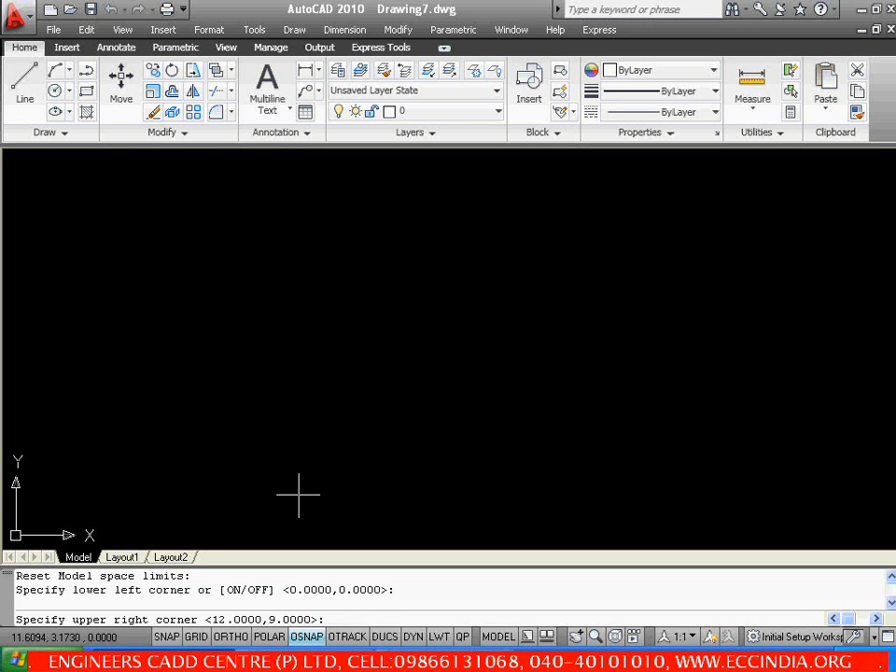In this session, let us see how to draw this figure. First, let me go to AutoCAD and set the limits. So go to AutoCAD, the limits, lower left is 0,0 and the upper right is 10,10. Then go with zoom all.

Now look at the figure. First I am going to draw the left side circles, that means these two circles. If you see here, the dimensions are clearly specified. The inner circle dia is 1 and the outer circle dia is 2.

Then after creating these two circles, I am going to draw the right side circles. In fact here they are arcs, but directly if I go with circle, it will be easy for me to pick as well as to specify the dimensions. So let me draw this figure by going with AutoCAD.

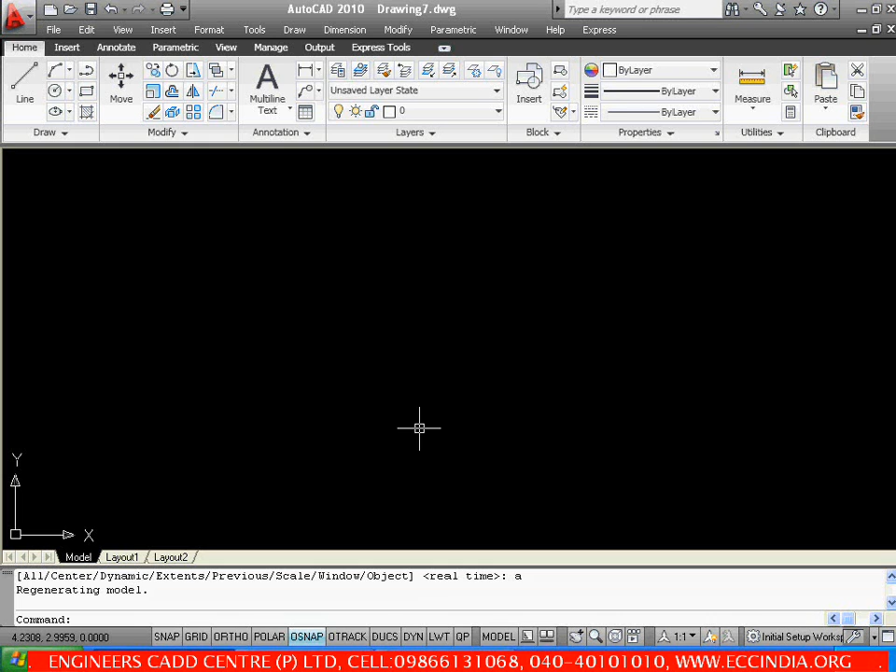First let me go with construction line. One is vertical, place it, and the other one is horizontal. So again go with XL, horizontal, and place it. Now I am going to use the intersection point of these two construction lines which I created as the center for the left side two circles.

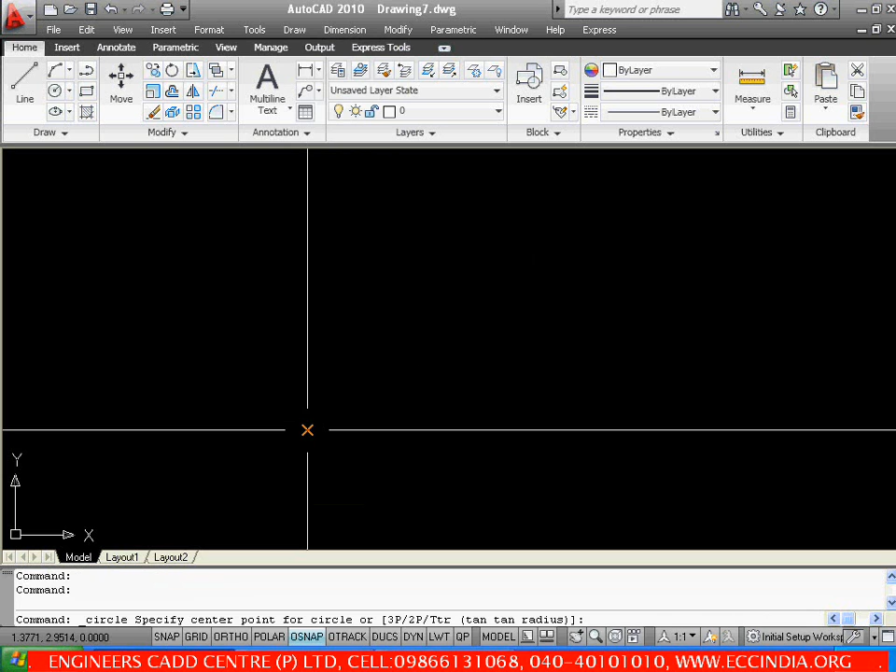So go with draw circle, center diameter. I need this intersection point, so pick the intersection point and the diameter is 1. Then again same option, draw circle, center diameter, pick the intersection point and the diameter is 2.

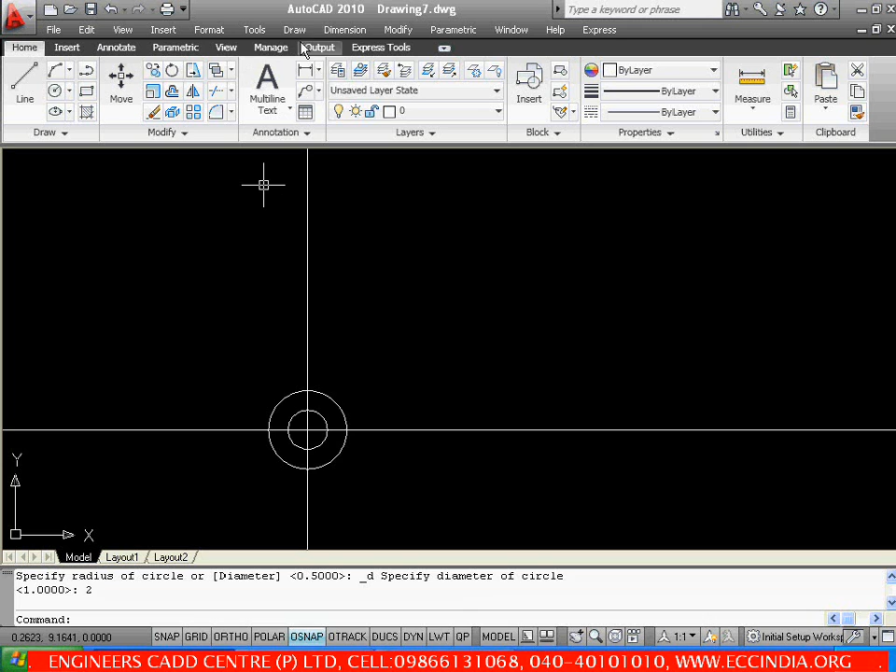Now next, to draw the right side circles, I am going to draw one more circle which I will be using as reference, and the radius of this circle is 3. So go with draw circle, center and radius. Then you can pick the center and the radius is 3.

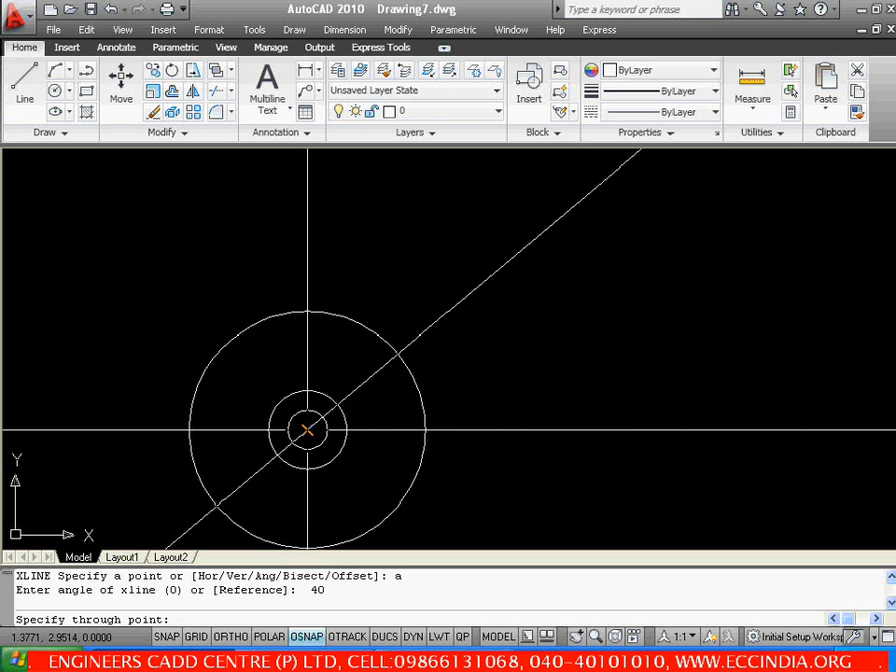And after creating this, I am going to draw one more construction line at an angle of 40 degrees, and this line will help me to pick the intersection point and to define the center for the top two circles. So go with XL. Now I want angle, so go with A, enter. Angle is 40 degrees, so 40, and then you can pick the intersection point.

Now let me draw the circles on the top as well as at the bottom, and the radius is given as 0.5 and 1. So I am going to draw circle, center and radius. Pick the intersection point, radius is 0.5. Then again the same option, draw circle, center, radius, pick the center and the radius is 1.

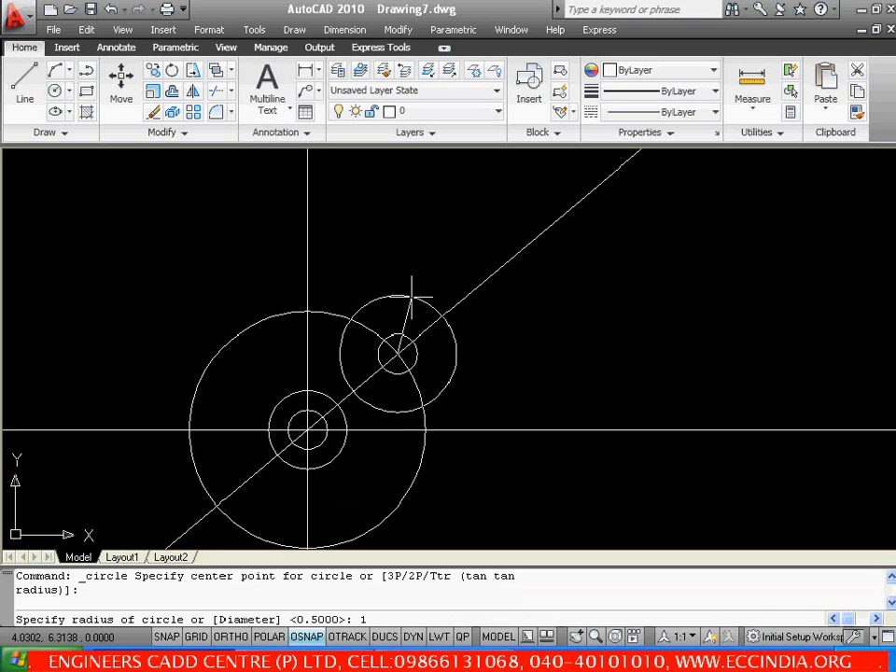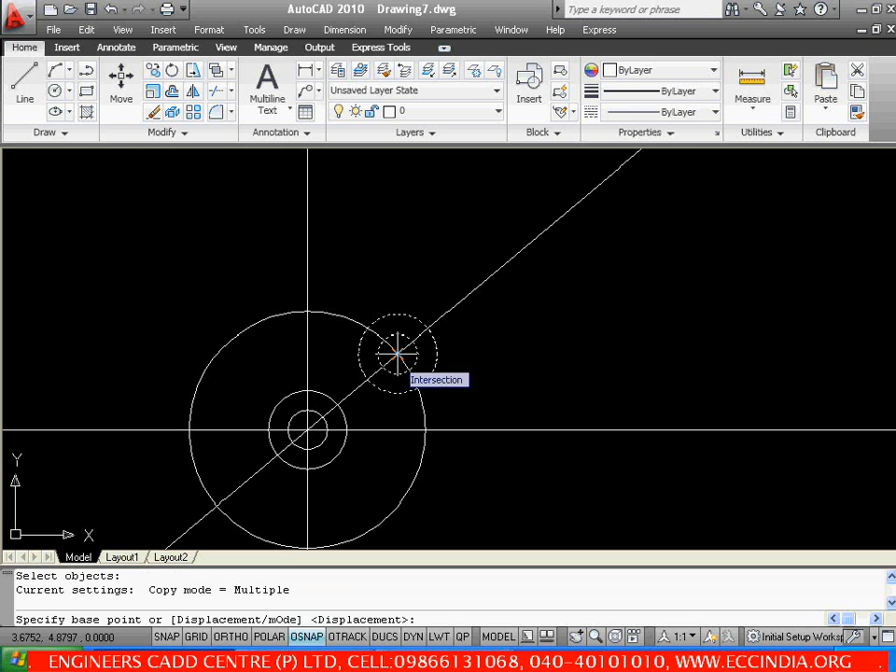Then similarly, if I want, I can draw at the bottom, or I can use the copy command, copy it and place at the required position. Now let me go with copy. So I am going with CO, select the objects, these two objects, then enter. Now the base point is nothing but the intersection point or the center of these circles. Then the destination point, let me pick here at the bottom. Now go with escape. So we got the circles even at the bottom.

Then after completing the circles, we need two arcs. One is on the top and the other one at the bottom. Now first let me draw the bottom, and I can draw this bottom one using fillet command, and the fillet radius is 3. Go to AutoCAD, say F, enter. Now here radius value I want to specify, so go with R, enter, and the radius is 3. Now I can pick the first object and the second object. So we got the bottom arc.

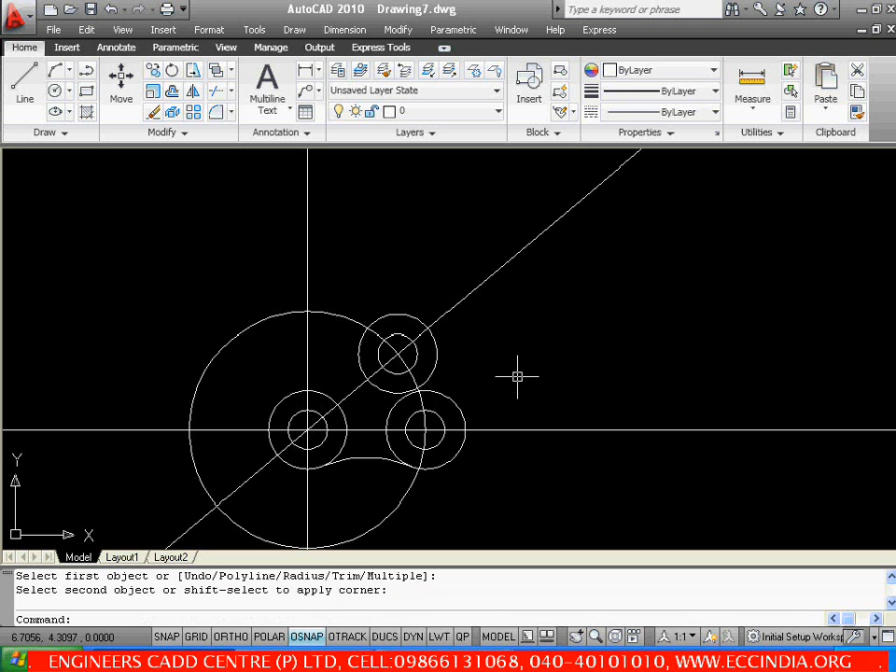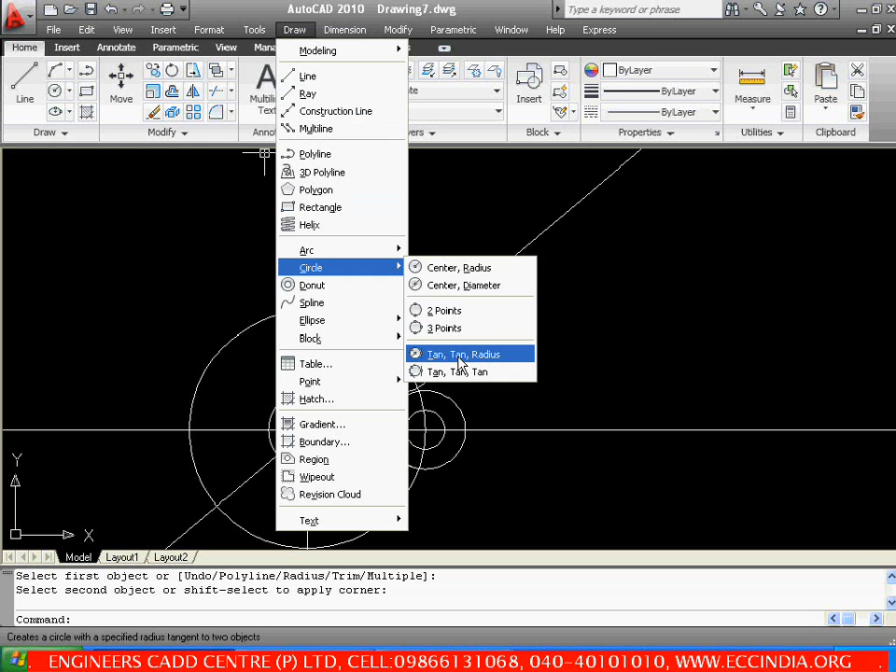Then to create the top one, I cannot use the fillet command, so that is the reason let me go with circle. So in AutoCAD I am going to draw circle, and here I want tan tan radius, because that arc is tangent to the top circles, as well as the radius value is given as 5. So I can go with tan tan radius.

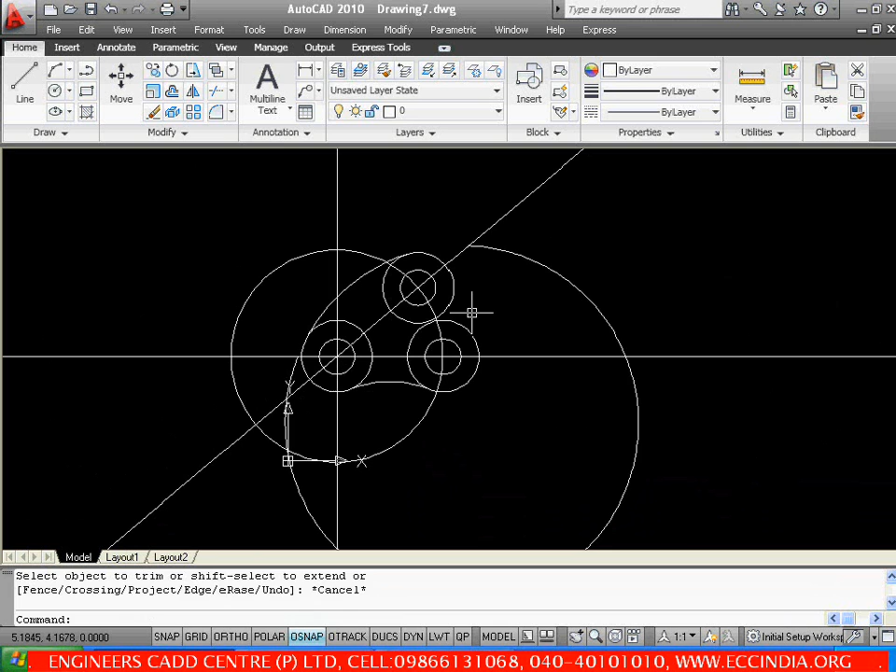First it is asking specify the point on the object for the first tangent. So I can pick here, and on the other object also I am going to define the tangency point. Then the radius I am giving as 5. So this is how we got the circle. Now I can trim out the unwanted portion. So go with TR, double enter and trim it. You can zoom the area and slowly trim out the unwanted portion. Then let me delete the remaining circle. So with this we got the top arc.

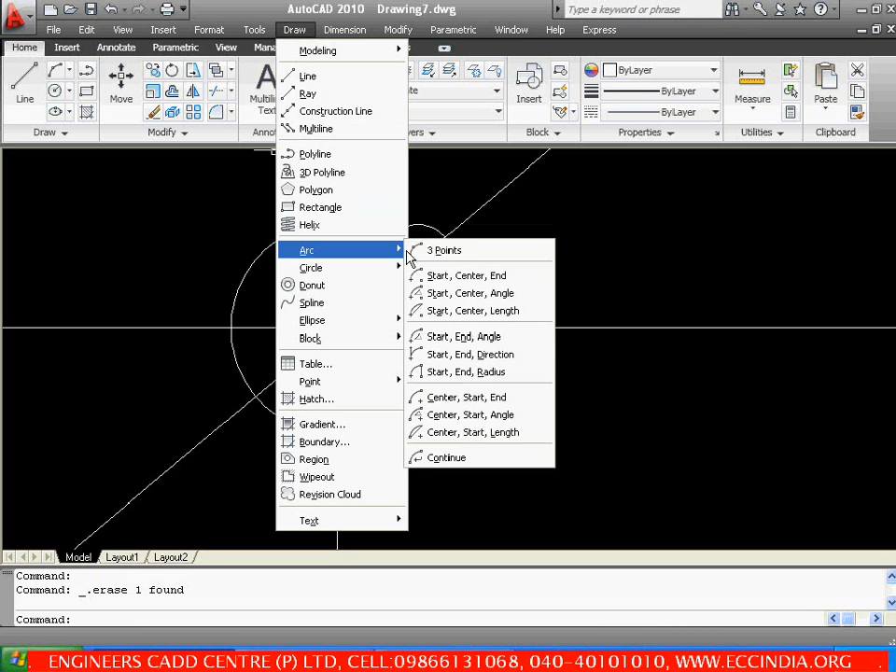Now let us see what are the remaining things, and we are left with these arcs. I can use the arc option because I know the center, the start point, as well as the end point. So simply by going with center, start, end, I can create these 4 arcs. So go with AutoCAD, draw arc, center, start, end. So this is the center, this is the start point and the end point. You can zoom that area clearly and you can pick the points.

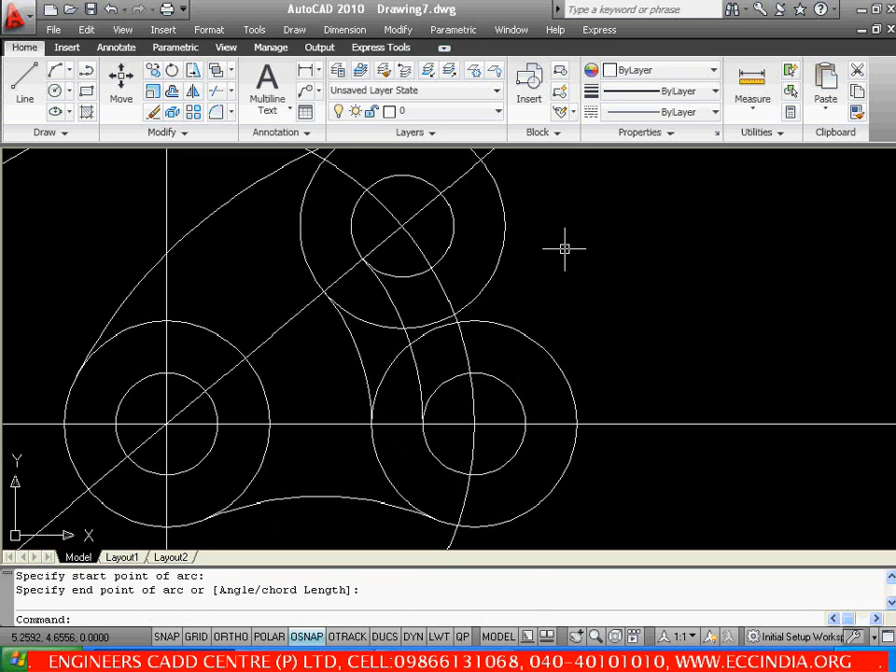So once again I am going with the same option, arc, center, start, end, center, start point and the end point. Then again the same option, center, start, end, pick the center, start point and the end point. Then again draw arc, center, start, end, pick the center, pick the start point, and then you can pick the end point.

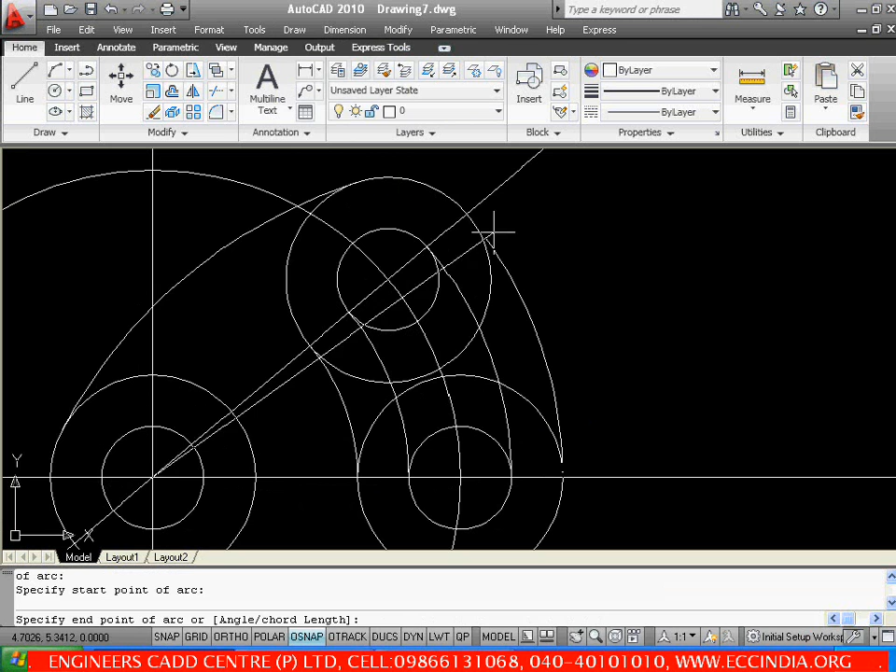Now if you want, you can trim the unwanted portion of the circles which we have drawn first. So go with TR, double enter. I don't want this as well as this. Similarly for the inner circle. Then at the bottom you can trim out, then go with escape, and then let me delete these arcs.

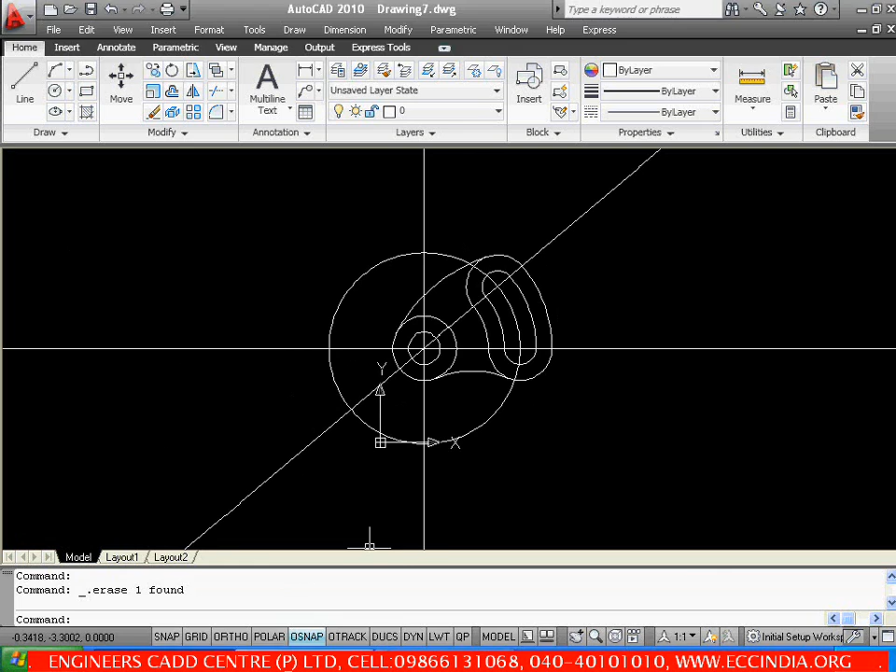So now if you see here, we have the complete figure, and even if you want, you can trim out this reference circle. You can just draw a line here and one more line at the bottom, and you can trim out the unwanted portion. For that, let me go with the line command, a simple line, pick 2 points. Similarly at the bottom again I am going with line.

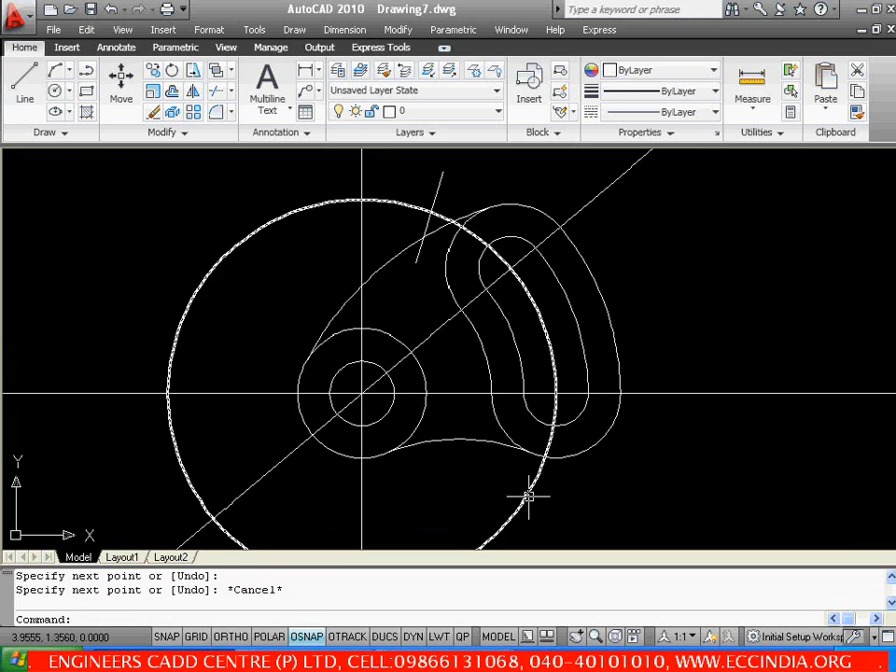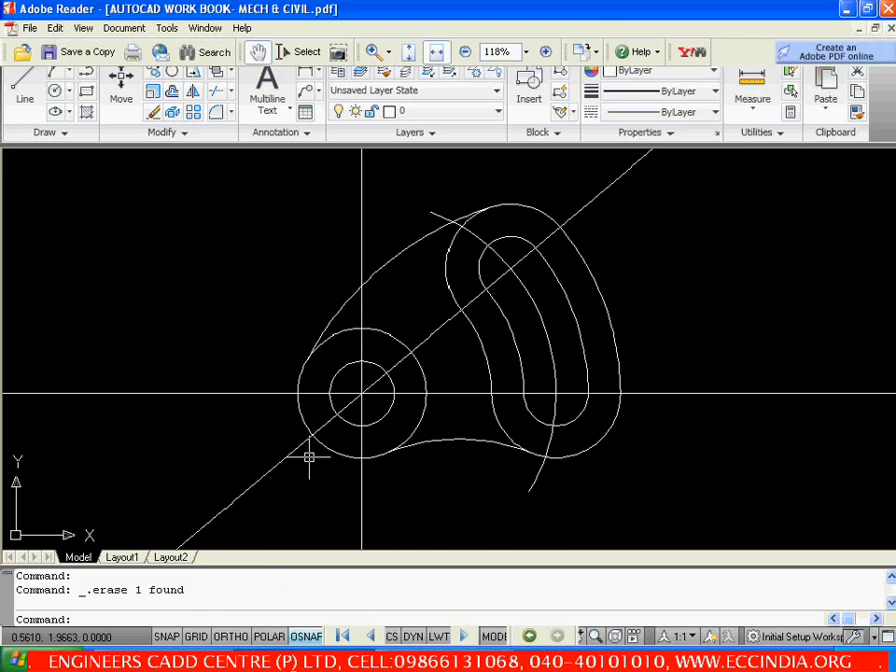Let me draw here a line, then go with trim command, TR, double enter, trim out this as well as this. Then the extra portion you can directly delete, and then you can change the line type using properties. So this is how easily we can draw the figure with the help of circles, arcs, fillets. Then how to draw the next figure we are going to see in the next session.